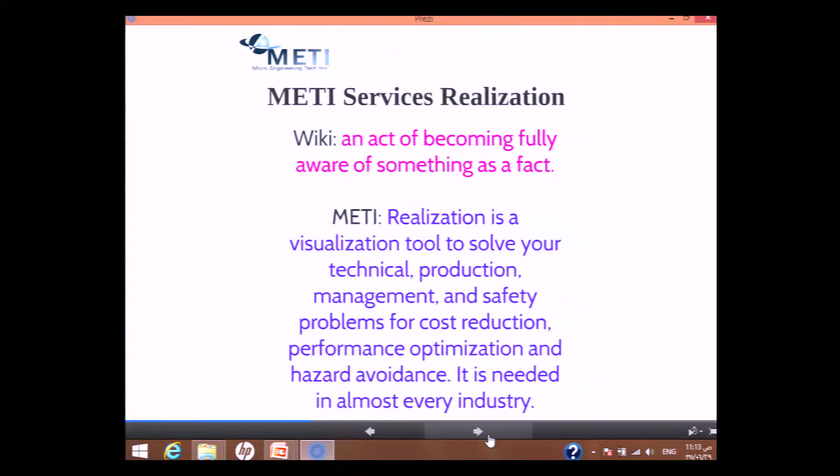And accurate data. Then going back to Optic, what Michael said, we're looking for accuracy from LiDAR and imaging. So METI's definition of realization is visualization to solve your technical, production, management, and safety problems for cost reduction and quality control, and efficient execution for your engineering projects.

Industries - we are active and operating in North America, mainly Canada (West, Central, and East), North Africa, and the Gulf area, and we have already existing clients in Saudi Arabia.

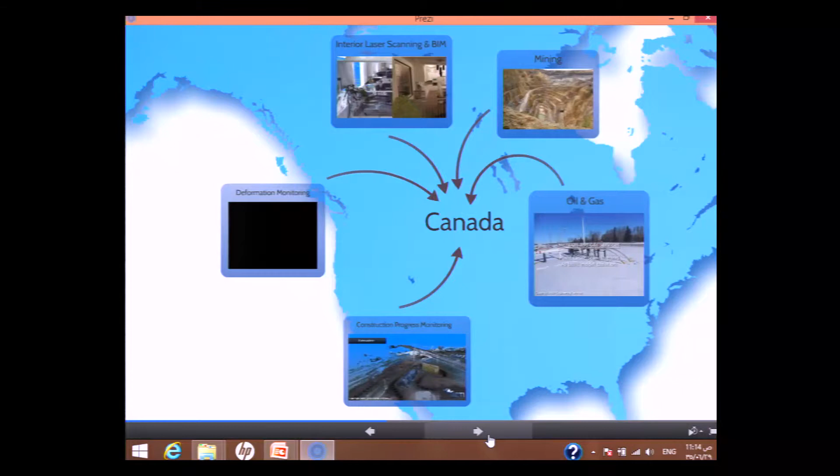In Canada, we are really focusing on 5 different industries: interior laser scanning and BIM, the new trend in interior design and architecture; mining industry; oil and gas; highway engineering monitoring and progress and earthworks; and deformation monitoring.

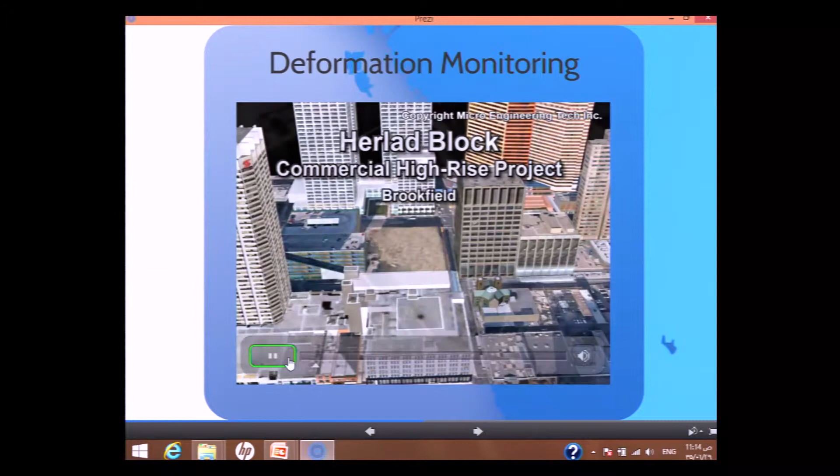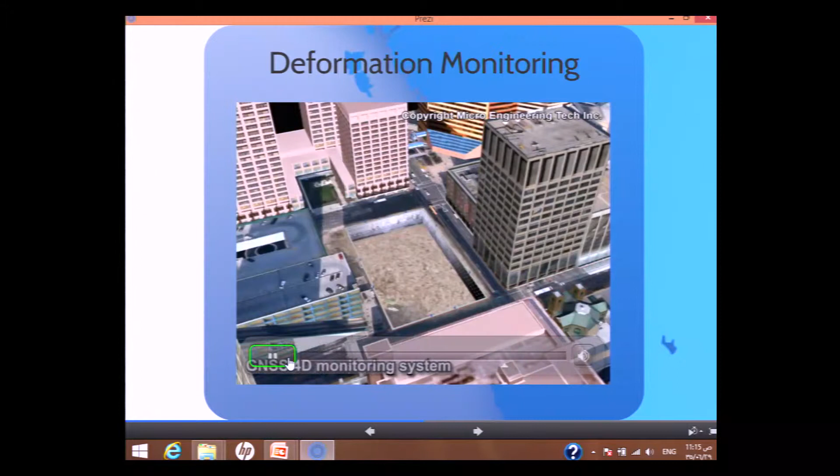So I'll pick 3 of the industries we're involved in, and mainly one of them is deformation monitoring for high-rise buildings. We are proud to be controlling and monitoring the highest 3 buildings in Western Canada. If you just Google the tallest skyscrapers in Western Canada, we were monitoring and providing precision engineering through integration of laser scanners, GNSS, geotechnical sensors, and robotics. This is one of the projects we are currently working on, Brookfield, 56 stories - a pretty high building in a congested area, downtown Calgary.

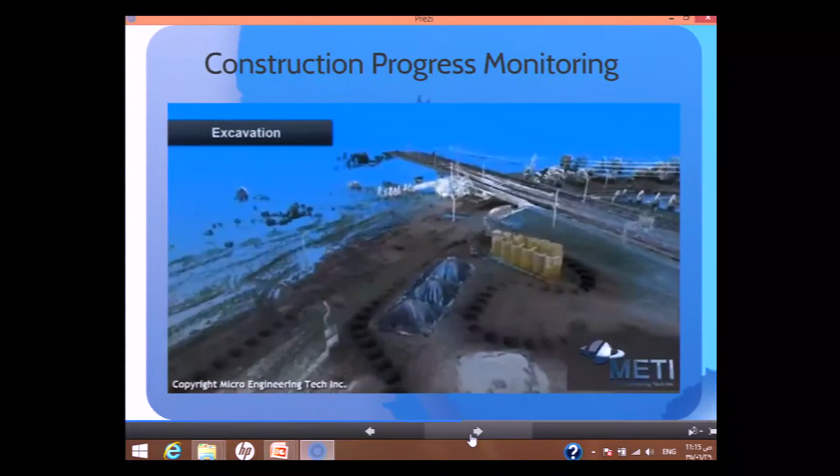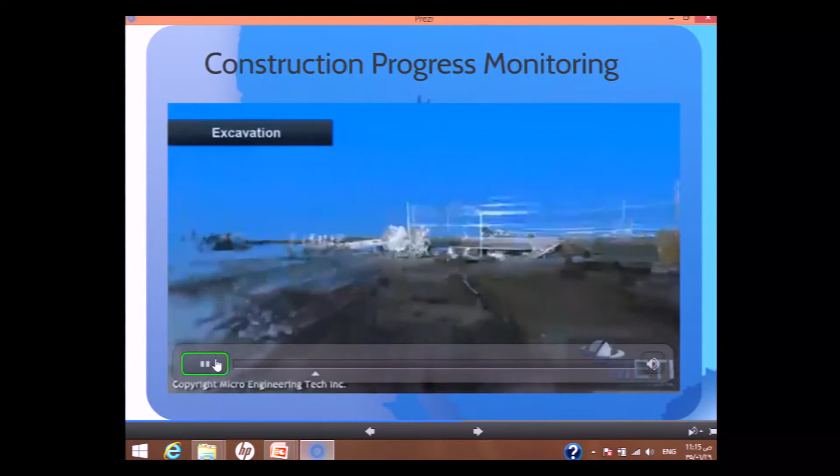Construction progress monitoring - last summer in Calgary we had a flood, and we had a real issue regarding downtown, it was covered by water. So there was a lot of maintenance needed for the highway engineering and the roads there. This is one of the lidar datasets we used for monitoring the progress in a project for replacing the asphalt. Again, we're talking about realization, so point cloud data is fine.

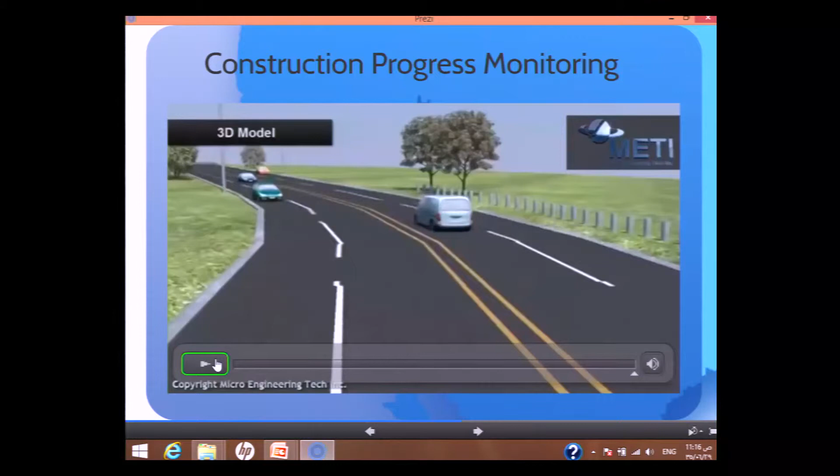Everyone can press the button. But you see here, cross-section, volume computations, complete reports for the client so he can really find the facts he's looking for realization. And finally, a 3D model. It's very important to say, engineering grade 3D model.

Oil and gas. Alberta's industry is very close to Saudi Arabia and the Gulf. Oil and gas is very important in Alberta.

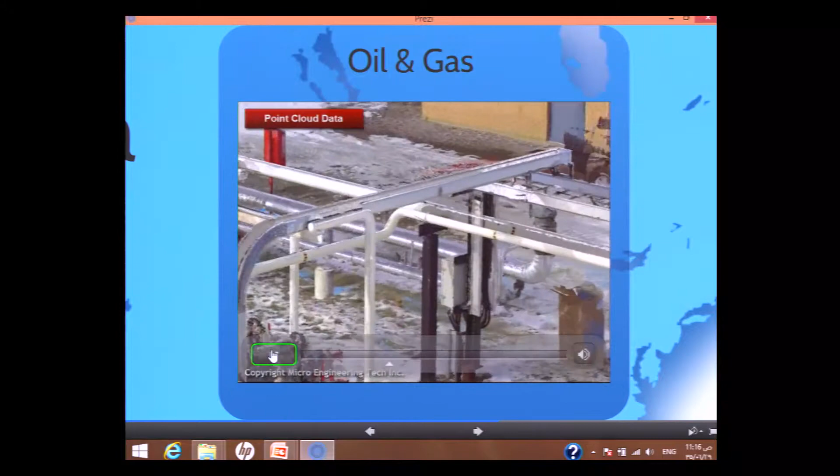These are pictures, and it's very important to follow these pictures because just in a second, we turn to point cloud. This is point cloud. If you can find the difference between colored point clouds and pictures, we should make a draw like yesterday. It's very close, so it's a very high precision point cloud.

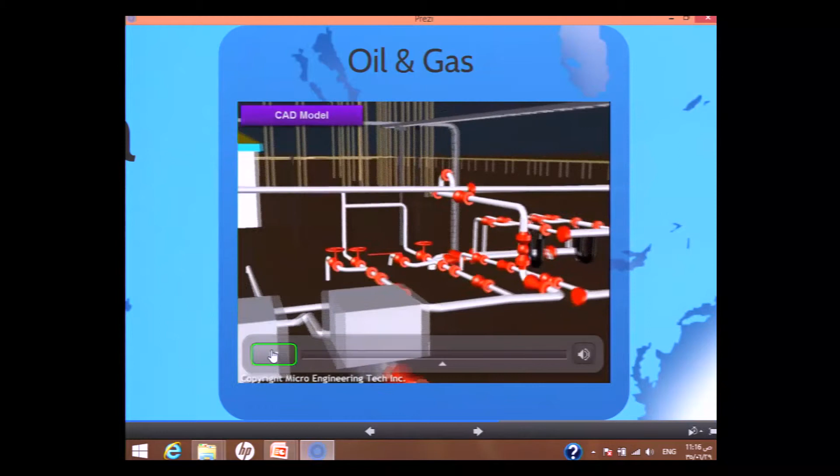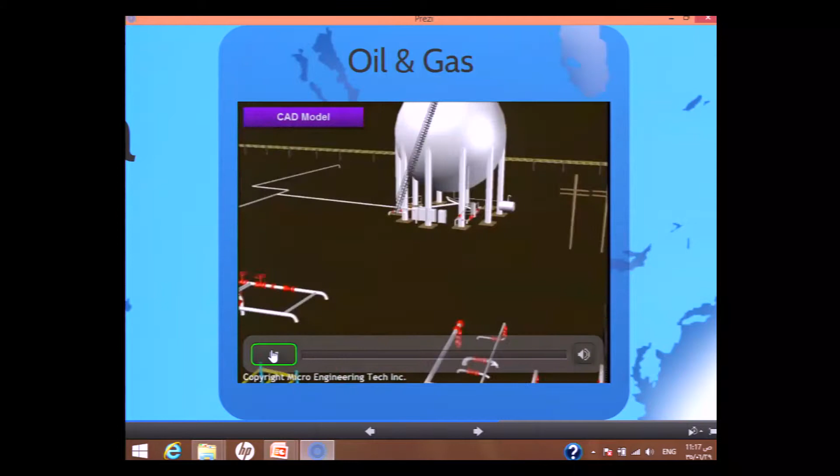Again, engineering grade. This is an output from the ILRIS. We go back again to the definition we started our presentation with, realization. Point clouds are not enough anymore. You're looking for CAD models.

You have a very long list of formats for the oil and gas industry: PDMS, PDS, Smart Plant 3D, CAD, AutoPlant. So it's very important in both the oil and gas and machinery industries to be familiar with precise field data acquisition up to the production of a CAD model.

So we just moved to North Africa. As you see, we have done several projects for realization for archaeology and precision engineering. So I'll pick up the precision engineering project.

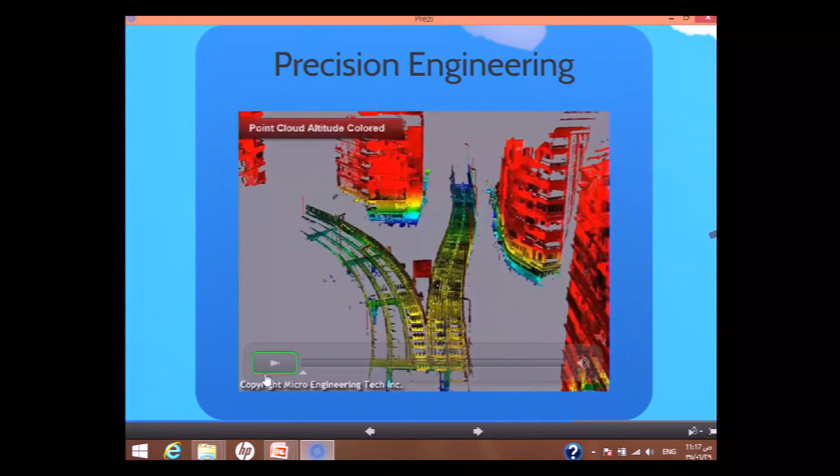It was with a Japanese company in Cairo. They would like to have a train on this very old bridge, but there were no drawings for the bridge. So we were looking to scan this bridge and get complete steel detailed drawings out of it.

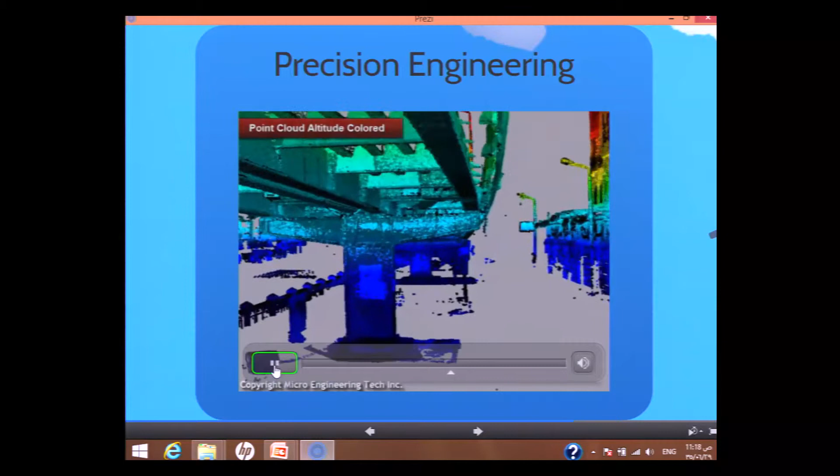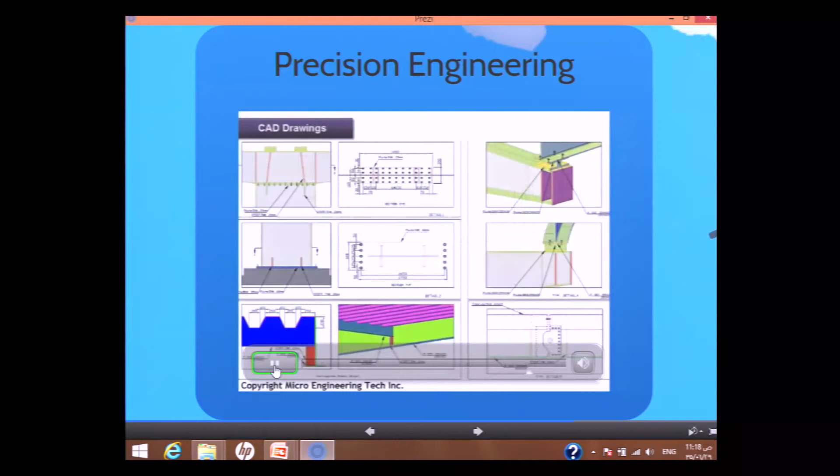This is the quality of the scan using the Optech ILRIS scanner, and these are the drawings with an accuracy of almost 3 millimeters. Complete detailed steel drawings from a precision engineering project for construction of a train.

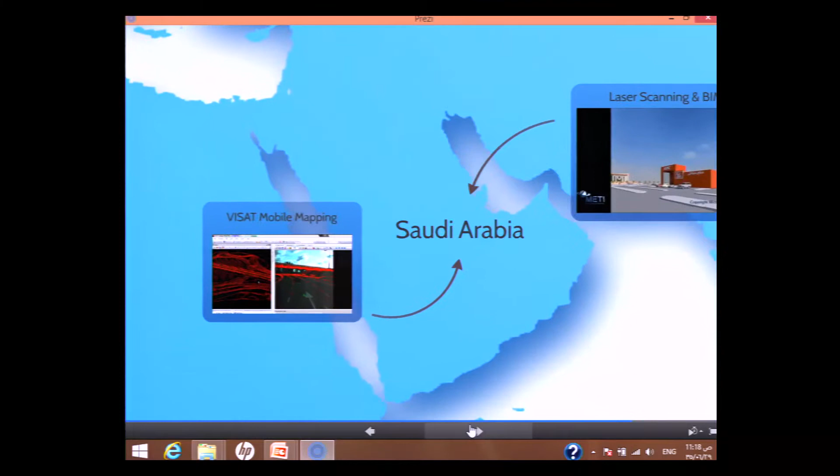Unfortunately, we cannot show the data we have with this client because it's confidential. But this is a project we have in Canada, and you see here complete production, GIS production in 3D.

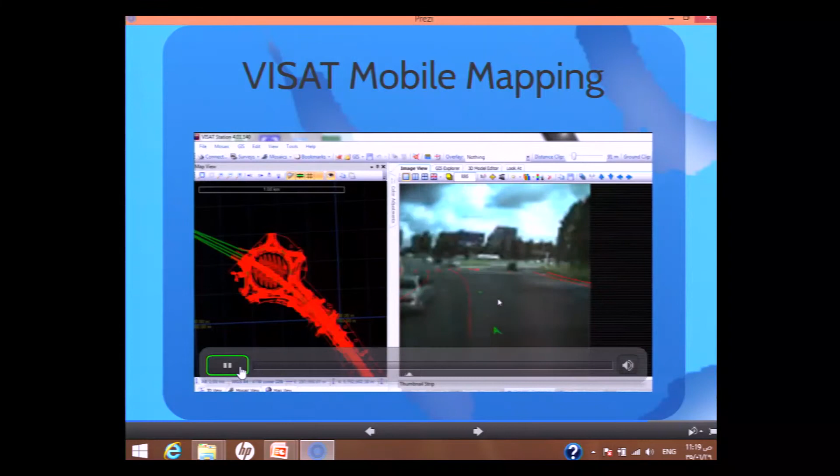On the right, it's the cameras with points, with attributes, ready for export in shapefile, compatible with Esri, Bentley, Autodesk. To the left, you see the production, which is very important, complete 3D CADs. This system is pure imaging.

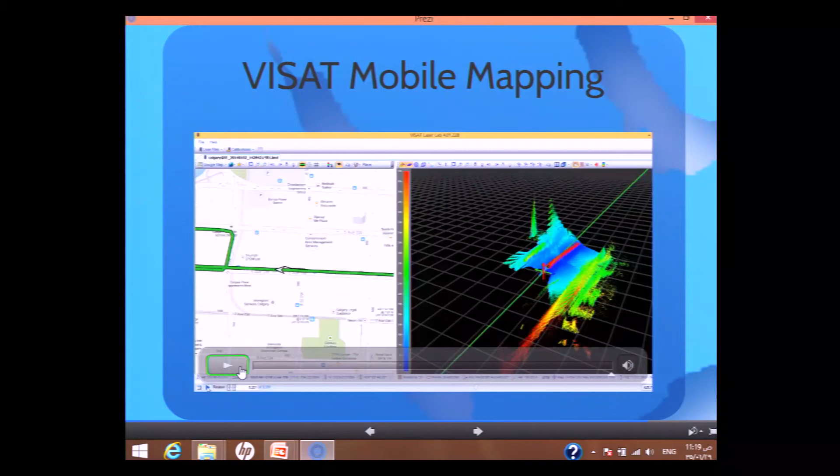This year, we're introducing the VISAT 2014 with integrated LiDAR. It's mainly to serve the industry more into depth, or the third dimension, but we still consider it an imaging system. More important here is the data management. With imaging, you can run it on any PC, so you don't need the high computational power compared to other systems.

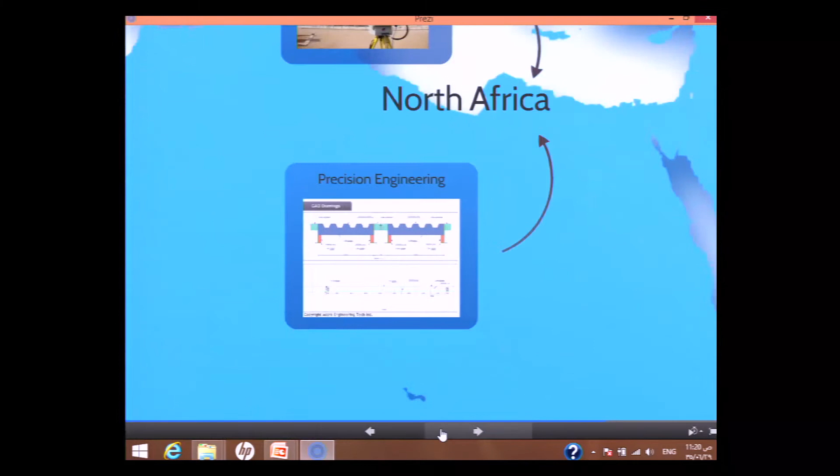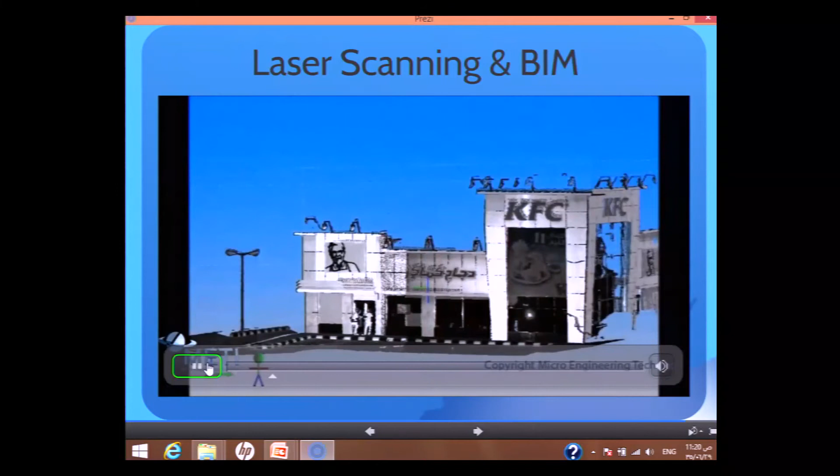Just going forward. Okay, last but not least, I think everyone here will be familiar with what we're showing. This is the area in Dammam around the Sheraton at the sea.

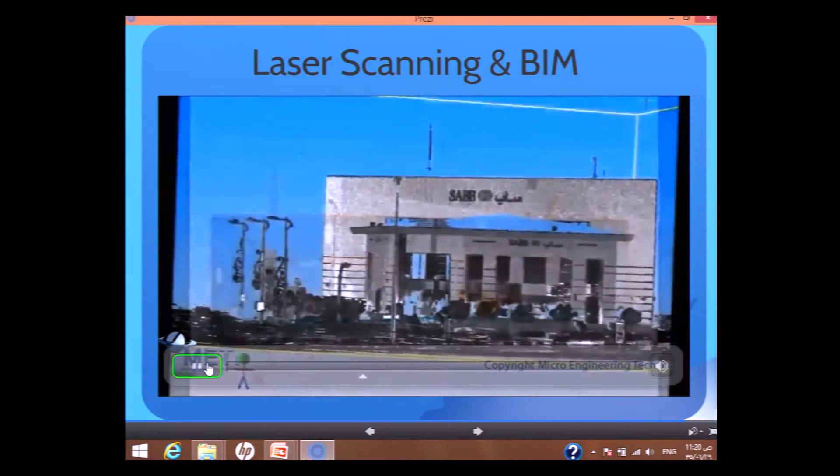It's scanned, modeled. This is SABB, the KFC outside, not an ad for them. And this is the Sheraton coming up, where we're sitting, as you see here. Scanned with the Optech ILRIS, high precision scans, complete 3D modeling in both Revit and 3ds Max.

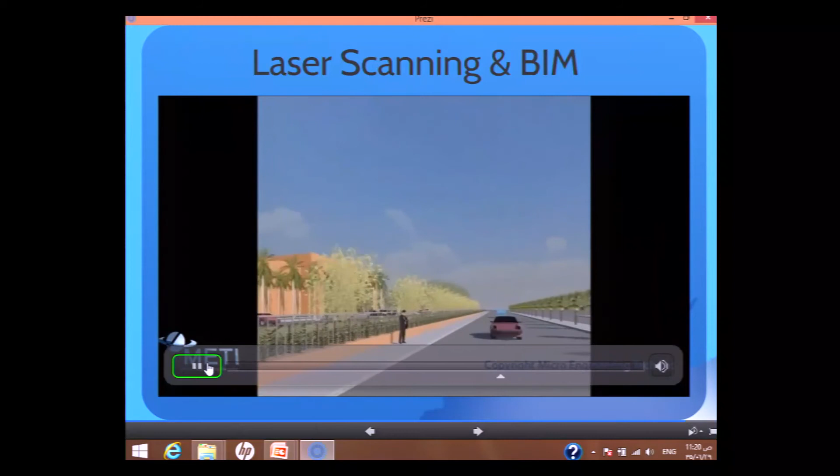It's a stop and go system. We have the ILRIS on a car, and this part is fully developed by Micro Engineering Tech Inc. So it's not a terrestrial system anymore, it is almost a semi-mobile system.

As you see here, complete modeling for the Sheraton where we're sitting right now. And this is really the value of working with Micro Engineering Tech Inc. and our partners, which is a turnkey solution for different industries through the geo market.